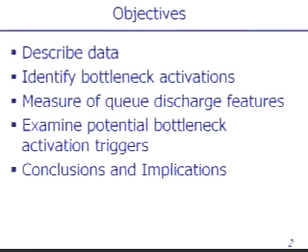It's one thing to study traffic jams and think it's neat to see the data, but the whole idea is: are there things triggering traffic jams? Are there bottlenecks being activated for predictable reasons? Because ultimately, traffic managers would want to be able to manage the flow of traffic. If there are certain things they can do, whether variable message signs, variable speed limits, or other information to the driver, that could mitigate some impacts of these bottleneck activations. Then I'd like to talk about implications of this research and what areas I think are really ripe for further research.

The data set I was working with is from Germany. On the map, Frankfurt is at the bottom, and the A5, which I'm going to discuss, is highlighted in yellow, studying a portion just north and west of the city. If you've ever been to Frankfurt, the airport is right down here — I think Schweinheim is the name of the airport area. I had a chance to visit last summer and, speaking with drivers there, noticed this is not only a heavily traveled urban freeway with a lot of commuters and other traffic, but also a major north-south corridor throughout Germany and the Hessen province.

The data set is about 30 kilometers in length, going from the south up to the north, from A648, an Autobahn connector into Frankfurt, up north to a small town called Friedberg. There's a series of 30 detector stations on the freeway, and the middle strip map shows these detector stations. The distance between stations ranges from about 400 meters up to 2,000 meters in the less traveled sections.

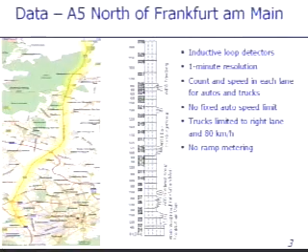It's worth mentioning that in Germany in 2001, when these data were collected, as well as today, there's very little in the way of ramp metering. There are no ramp meters, at least there weren't in September on this highway, and I didn't hear of any plans to install them anytime soon. So no ramp metering on those freeway interchanges.

Looking back a bit at what's been done in freeway studies in the past, there's really a wealth of good, solid studies conducted previously. I'd say going back at least 50 years of people analyzing freeway bottlenecks. I think of that 50 years as being about as long as freeways have existed. So I think as long as we've had freeways, we've had congestion problems, and to a certain extent, some bottlenecks.

A lot of the data from early studies were limited by the collection techniques. They were manually collected, either going out and doing direct observation, or maybe analyzing air photographs, which is great data, but it's really hard to collect large quantities of it to get the breadth and depth of research we're looking for. So you had short durations, studies occurring at fixed points that were very interesting, but it maybe wasn't getting the full picture unless you could look at a larger strip of roadway over a longer time period.

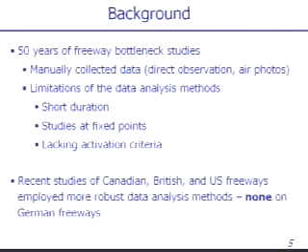There have been a number of good studies more recently on Canadian, British, US, and now German freeways using better, more robust analysis methods. These are now being applied in this study and in some good work being done right now here at Portland State by the ITS lab on German freeways using these data analysis techniques.

What you can do to clean the data up a little is aggregate it into larger time periods. But that diminishes your ability to determine exactly when certain things occurred on the roadway. So I think there were some real limits in this.

Flow - vehicles per hour in this case. So it's a rate, a traffic rate.

Thank you very much. I think I copied and pasted - yeah, it should be vehicles per hour, certainly.

Apologies for that. So the limitations of some of these data analyses - you can certainly see drops in speed, but are you going to be able to find out exactly when the drop in speed occurred? And are you going to be able to pin it to a particular point in time and a particular place on the roadway where a bottleneck has become activated? That's the key and the objective of my research.

This method is a plot of cumulative counts. Imagine on the x-axis we're plotting time, on the y-axis we're plotting cumulative count, the number of vehicles that have passed a point X. So someone's standing there on the road counting these vehicles going by and the times that they go by. Cumulative count means the total number of vehicles that have passed a stationary observer at one point.

If you would see a change, first let's define what the slope of this line is. It's not kilometers per hour—this is flow, so this is numbers of vehicles per time. I'm looking at it primarily in vehicles per hour. So if the slope is flow, then changes in slope represent either flow increases or flow decreases.

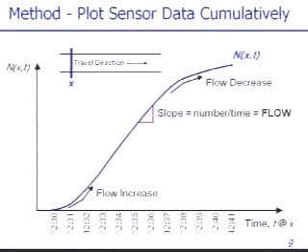It sounds good, and it works well on this style of graph because I just made this up on Excel with some fictitious data. But when we look at data coming from the freeway, we find a very large number of vehicles going by—5,000 vehicles in a 1 hour period. When you get that cumulative count plotted on the time series, you'll find that it looks like a straight line.

There's a little bump there, see around 1,400, but I couldn't tell a whole bunch from that. So I need to zoom in, right? Need to get in there and look in a little more detail.

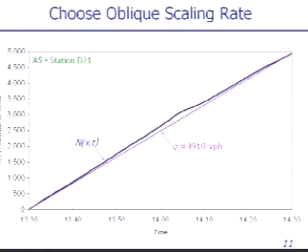The way I zoomed in was to take a straight edge and find out what is the average flow that's occurring throughout this time period. I put my straight edge on there and find out that the time period average flow is about 4,910 vehicles per hour. That's what that pink line represents. So if the blue line represents cumulative count, the pink line is kind of the background flow, if you want.

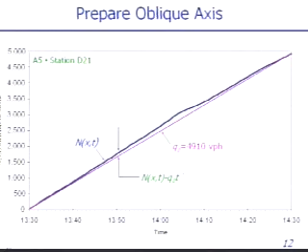Then what I wanted to do was plot a smaller variable. Instead of plotting the entire n, I plot n minus the count at a particular time. I get the count at a particular time by taking this background flow rate of, say, 4,910, multiplying it by the time elapsed from the beginning of the analysis period. Then what I'm really counting is just the number of vehicles between the two lines. When I plot the number of vehicles between the two lines but hold the y-axis the same, I get that same plot, which makes sense.

But now I don't need to plot all 5,000 vehicles, right? I only need to plot up to the limit of the spread, which was about 250 vehicles in this case. So now by plotting time on the x-axis and on the y-axis the difference between those two lines, I get a line that instead of just having a little blip around 1,400, now shows what to me was a pretty notable flow drop.

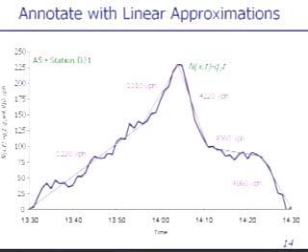So again I get the straight edge out and do some piecewise linear interpolation here, and I get some differing flow rates. The one that really stands out is this 5510, dropping pretty significantly, I think, from 5510 down to 4220. So it's no longer just a little blip on the graph. Now I'm getting into detail, finding out when that flow drop occurred.

Work with me for a moment. If you go back to that previous slide where we talked about the standard cumulative plot at one station, I'm now calling that X1. What if I added another station and called that X2?

So now I'm getting counts at two adjacent stations. The difference between these two stations on the time axis is going to be the trip time between the two stations. And if you think of it, the free flow time it takes for a vehicle to get from X1 to X2 in freely flowing traffic would be that reference vehicle trip time. What else can we see from this graph?

Well, for example, at any particular time, say T1, the difference between these two plots would be the number of vehicles that are on the roadway between X1 and X2. And then at a particular vehicle, say vehicle J, we can see its trip time. So I said in general we're talking about the horizontal difference being trip time, but we can actually pin it down to each individual vehicle's trip time.

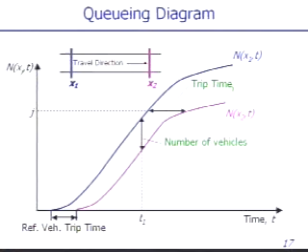Now imagine I take that upstream curve and shift it to the right by the free flow trip time. If all the vehicles were freely flowing, the two curves would be perfectly superimposed, right? Because each individual vehicle's trip time would simply be the free flow trip time. And in the early reaches of the curve, that's shown—those two lines are sitting one on top of one another.

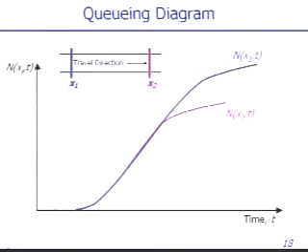So what can we say? We can say that in the shifted curve analysis, curves that are superimposed represent freely flowing traffic between those two stations. Now where the curves are separated, we no longer just have time, we have the excess of time, right? So the difference between the blue and pink lines here horizontally for a vehicle K is excess travel time. Traffic engineers, we like to call that delay.

And for time 2, what's this accumulation? It's not just the number of vehicles on the roadway, it's the number of vehicles on the roadway between X1 and X2 that's in excess of what would be there during freely flowing traffic. So we have excess accumulation and we have delay. Well, those are traditional definitions of congested traffic. We have congestion now—in other words, the activation of a bottleneck. Something is being caused, or at least it's occurring, at these two stations.

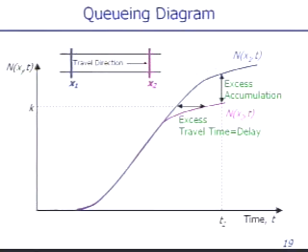There's something occurring. Now, whether it was activated further upstream or downstream, we don't know yet. We're just looking at two different stations that are adjacent to one another.

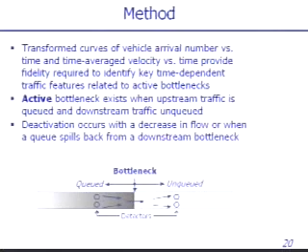Think back to the traditional definition of a freeway bottleneck. It's just a point on the road, downstream of which traffic is flowing freely, unqueued, and upstream of which traffic is queued. That's the fundamental definition of a bottleneck, and by taking that analysis technique shown in the previous slide and applying it to longer time periods and multiple stations, we can start to find out when and where freely flowing traffic existed or didn't exist.

So that's what I'm going to do next. I'm going to show you how those lines that were just created to illustrate the basic idea have now been applied to some real data.

The real situation I'm looking at here is on the A5, an interchange on the north side going off into a smaller town called Friedberg. You'll notice that station D24 is immediately upstream of the off-ramp. I've got data here for stations 24, 23, 22, 21, and 20.

D24 I've plotted in black, with the difference in cumulative count plotted on the y-axis and time on the x-axis. Then I've plotted stations D23, 22, 21, and 20, shifting each of those over by the free flow travel time.

Now it's not quite as clean as it was on my hypothetical drawing. Not all these lines are perfectly superimposed because there's a little bit of variation going on in the traffic. For one thing, the traffic detectors aren't necessarily catching each and every vehicle—there's a bit of detector error, and people change lanes right as they're going over a detector, those sorts of things.

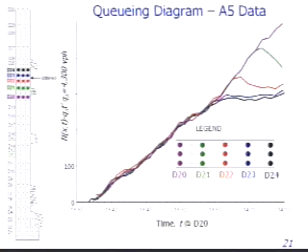But you can see there's clearly a trend here. We're seeing that stations 20 all the way through 24, for the early reaches, almost until about 1400, those lines are pretty much superimposed. It really looks like freely flowing traffic.

If you look at what's happening at station D22 at 1402, you'll see a distinct change in the behavior of the graphs. Curves 23 and 24 remain superimposed, so there's freely flowing traffic throughout the time period, including past 1400, between stations D23 and D24.

But upstream of that, we're starting to see separation vertically and horizontally—excess travel time and excess accumulation. So there's congestion. We can see that at about 1402 is where the spread started to occur between stations D22 and D23.

And then at station D22, we see a drop in flow. Why would there be a drop in flow? It's because we have a shock moving back through the traffic stream, and the drop in flow is now hitting station D22, upstream of this occurrence.

So downstream of D23, stations D23 and D24 have freely flowing traffic—we say those are downstream of the bottleneck. Stations D22 and D23 have excess accumulation and delay, so we say that's upstream of the bottleneck. It's somewhere between D22 and D23.

With the data that I had, I can't get any more detailed than that. I don't know exactly where between those two stations, but I do know it's occurring between them.

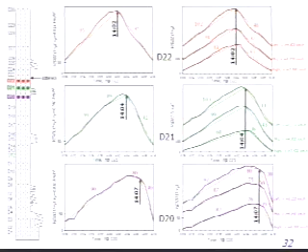I could also look at individual cars and trucks. I haven't shown that graph here, but these are things I analyzed to look at how vehicles were being impacted on the roadway, trying to see whether there's any discernible difference between car and truck behavior. This shows the rest of the speed curves.

But now we're looking downstream. Why would there be velocity drops downstream of the bottleneck? At first that doesn't seem to make sense. But if the cars have had to slow to move through the bottleneck, imagine they are accelerating out of the bottleneck, away from it, but they're not going to instantly get back up to their free flow speeds. These German drivers drive quickly, so for them to get back up to free flow speed may take a little while.

We will see at station D23, the first station downstream of the bottleneck activation, that this is actually occurring. When I first saw this data I thought something was wrong, and I went to Rob Bertini and said, help me figure out why the speed is dropping earlier at station D23 than at D22.

So Rob, as he does on the great whiteboard there at the ITS lab, drew me some pictures, and we got the idea that the backward moving wave is not moving at the same speed as the forward moving shock. The shock of increasing speed moves at the speed of the vehicles, so it might be moving much more quickly downstream than the shock that's moving upstream.

That's why this drop at station D23 is occurring just slightly before we saw the speed drop back at station D22. Does that mean the bottleneck is closer to D23? Not necessarily, because the speed of the wave is also faster. So you could do a kind of triangulation to try to figure out where that occurred between those two stations.

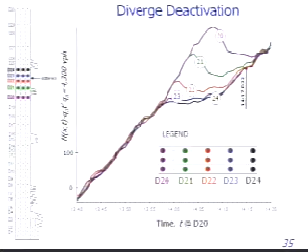Now, there's still queued traffic further upstream, and it's going to take a while for all the effects of that queued traffic to dissipate, so I can look further upstream. Before I do that, I just want to verify that when the curves came back together, I should see an increase in speed, right? Because freely flowing traffic means the bottleneck's dissipated between 22 and 23. So now it's free flowing at station 23, and it's free flowing at station 22 at the point where the curves come back and the speed increases. So I see speed increasing at about 1417 here.

So now I've got bottleneck activation, bottleneck deactivation. I've defined the limits.

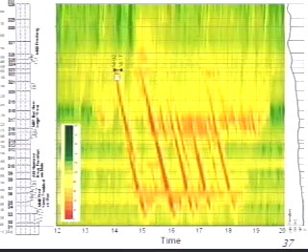And remember, I mentioned that red line moving back through the traffic stream. This is the shock speed. You're driving down the road, and this is everyone putting on their brake lights. That's the speed of that shock. If people were all reacting at the same time, we would see the brake lights coming on in progression, and that's the speed of that shock moving back through traffic.

It was a speed of approximately 21 kilometers per hour. Notice how close that line, if we took that slope of 21 kilometers per hour and compared it to all the other shocks, they all seem to be behaving the same way. So I'm an engineer, I get excited about straight lines, and the fact that repetitive straight lines are all occurring at the same time.

To me, that was pretty novel. So again, I went to my colleagues at the ITS lab and said, what else has been done? Do some more reading, find out. Yeah, other shocks have been measured, and in fact this is not an unreasonable speed. This type of speed had been seen on a number of different roadways. I'm not saying it's the exact same on every freeway, but there seemed to be some reproducibility of that.

So I repeat that analysis many more times, okay? I plot so much paper that it fills up two filing cabinets in my office now. But I use all these subplots that I've showed you, the shifted and oblique plotting, to find out that there are a whole bunch of bottleneck activations on that day, and they range from very short in duration and very limited impact on the road to some ones that had some pretty serious, long-lasting impact.

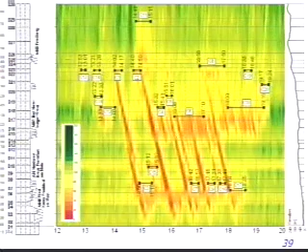Okay, once the spatial and temporal limits of the bottleneck activation have been established, I know when and where, for how long. Then I can start to look at what's the so-what question. So why look at this stuff? Well, I told you that I wanted to look at what might have caused them, but I also want to look at the impact of the bottleneck itself.

Well, I think maybe we should, because the capacity of the bottleneck is not necessarily the same after it's been activated. So the pre-bottleneck activation flow here of 5,190 in 3 lanes seemed a little lower than what I was thinking. I looked in the German highway capacity manual and found out that actually that was not out of line with what German engineers would say is the expected capacity of a 3-lane facility like that.

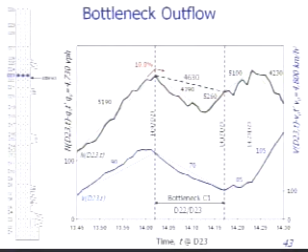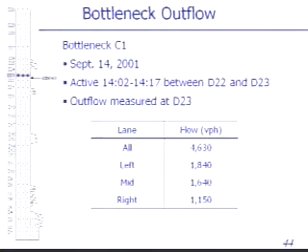Just an example of some of the data and how I reported some of the results. I looked at this bottleneck C1, as I showed you. It was active from 1402 to 1417. Here's the outflow. I looked at it on a lane-by-lane basis, and then also all lanes together. You can see the left lane carrying the majority of the traffic while the bottleneck was active: 1,800, 1,600, and about just a little less than 1,200.

It turns out that in the 6 days I analyzed in my research, a bottleneck occurred between stations D22 and D24, and I grouped those together because I felt they were being influenced by the same exit just downstream of station D24. So I called that range of about 1,200 meters between D22 and D24 one analysis area, and found that 21 times, pretty repeatable, this bottleneck was being activated. The durations ranged from really short, 7 minutes, up to 223 minutes.

So there was a couple of really long activations there. And it was interesting to note that in those 21 times, I had average flows that were reasonably close. 4,890 is the average flow. You can see the standard deviation there. The left, mid, and right lane flows are shown as well.

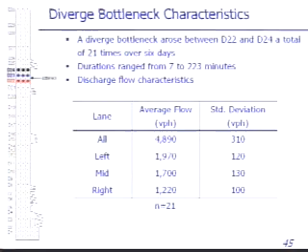12 of those 21 were of particular interest to me because they were bottleneck activations that occurred when the previous traffic flow was free flow, uninterrupted flow, okay? So if we've got freely flowing traffic occurring prior to the bottleneck being activated, I tried to differentiate those from bottlenecks that were being activated and impacted by the flows from downstream bottlenecks. If the flow was being choked off downstream, I had a hard time really taking that data and analyzing it explicitly for mine, right?

So I wanted to be looking at bottlenecks that were kind of isolated, not being impacted by downstream bottlenecks. I called these isolated bottleneck activations. So 12 of those 21 were isolated bottleneck activations. In particular, what I was interested in here is whether that drop in flow I saw in this apparent two-capacity thing occurred at more than one place. Was it repeatable? Was it reproducible? So here we've got, on both all lanes and on a lane-by-lane basis, the pre-queue and the discharge flows, and then the associated drops.

I think what was interesting here is that the overall flow drop was a little over 4%, but a large amount of flow drop was occurring in the left-hand lane, the faster flowing, automobile-dominated traffic. In the mid lane, a much less pronounced flow drop, and then in the right lane, almost an imperceptible flow drop across the 12 stations. So in the right lane, where it's pretty much truck-dominated, we weren't seeing a big decrease in flow after the activation of the bottleneck.

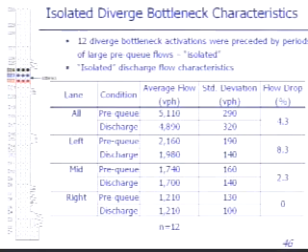Now, it's important to know what's going on downstream, what's happening at the outflow side, the outlet, right? I mentioned why that's important for a freeway manager to know what is the real capacity of my section of freeway. And more than just looking at a book, is there a way of actually determining with real data what the capacity of that section of freeway is?

But also it's important to look at what's going on upstream and what might be happening in the traffic flow that has the potential to trigger a bottleneck activation. So I looked at a large number of different things here. I looked at lane changing, and I looked at trucks and cars and things like that. I want to show you just a few of the slides that led me to some conclusions related to bottleneck activations.

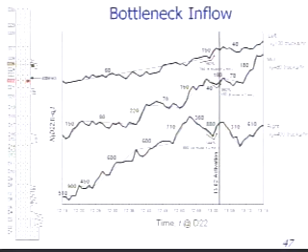But if a few of them start to go around right at the time where the rest of the traffic seems to be building up, now you've got a truck that's maybe at 80 moving over into the mid lane where cars were wanting to move at 130 kilometers per hour. You can see the impact that would have. And so trucks moving out of the right lane into the mid and left lane seem to be causing some of this, the triggering of the bottleneck activation.

I want to look at bottleneck inflow again, but now on an all-vehicle basis. And what I'm doing here is looking at the left, mid, and right. I've parsed it out by lane. And I want to look at just the 2-minute band. See that little gray area there on the graph? That's showing the 2-minute period just ahead of the bottleneck activation.

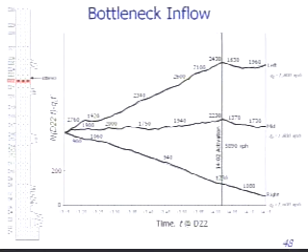Look at the left-hand lane, 2,430 vehicles on an hourly basis in that 2-minute period. That's a pretty significant flow. 2,230 in the mid lane, 1,380 in the right, quite a bit lower, but remember that those are long vehicles because, as we saw in the previous slide, a very large percentage of them are trucks.

In addition, there was this idea of the trucks and their influence on the traffic stream. One of the things that I looked at, and there's always a concern that highway engineers have: how do we track the influence of a truck on a traffic stream? What we often try to do is make them equivalent to a certain number of cars, and then we replace it in the equation.

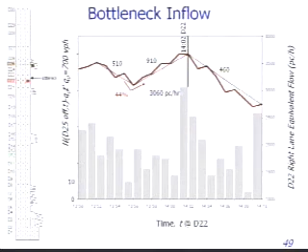It's kind of a standard thing that's done. The Highway Capacity Manual has some guidance on that, what sort of passenger car equivalent rate to use. Because these weren't severe grades, I chose a value of 2 passenger cars for every truck. I wanted to look at equivalent flow—if we take all the trucks, turn them into 2 passenger cars, add them up with the passenger cars, what's the flow rate? That's what's shown on the bar graph here. See the big spike, 3,060 equivalent vehicles per hour in that 1-minute period just ahead of the bottleneck activation. So further indication of trucks and their influence in the activation.

So it's when an increase in truck traffic coincides with an increase in overall traffic. And then in several of them, in 7 cases, there was also a notable increase in the off-ramp demand. Maybe it's some vehicles moving over from the left lane, moving their way over to the right lane in order to exit. Of course, they've got a pretty steady stream of trucks there, so it's not the easiest thing to get into that lane. There's another issue that comes into play with bottleneck activations.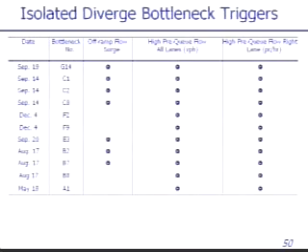The deactivations were not quite as voluminous. I didn't have as much data as I would have liked here on the isolated bottleneck deactivations. I'm going to show you a couple things that seem to be reproducible, but to say something's reproducible over 2 activations is not a real strong statement. I'm continuing work in this area with others to try to get more data on these bottleneck deactivations. But as you might expect, it seemed as though when we had a drop in off-ramp flow, so there's less demand at the off-ramp, that seemed to coincide with it. It happened in both of the 2 cases that I analyzed.

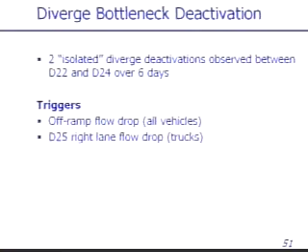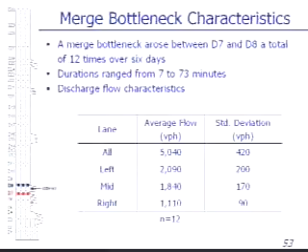Also looked at merges. I'll spare you the details of all the graphs, but I did the same thing for merges, looking at areas where vehicles were merging onto the highway. I found that a merge bottleneck arose upstream on the roadway between D7 and D8—you'll see there the red and blue stations. 12 times that bottleneck area had an activation, lasting 7 to 73 minutes, again pretty widespread. Here's some indication of the average flows, both on an all-lane basis and then left, mid, and right.

What happens on merge—do they experience the same sort of 2-capacity phenomena that diverge did? Yes, according to my results, they did. Not maybe as large in magnitude, a drop more like 2.5%. But notice where the majority of that drop is coming from: it's the mid lane, quite a bit different than the diverge, which was left. Now notice the right lane does experience a flow drop. Of course, the right lane is the area having the most friction between the merging traffic and the diverging traffic, and also the mid lane, that's what's receiving the lane changes.

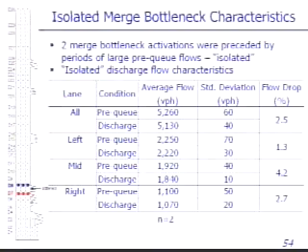I noticed that the German drivers are actually quite polite in a way. Not if you're traveling slow in the left lane, because they flash their lights at you, but they're pretty good at interchanges, and I find them, in a way, kinder than some American freeway drivers, where they would let you merge over to allow for incoming traffic. People in the right lane were pretty good at making gaps for incoming traffic, and the mid lane people were allowing people to make lane changes over, which was nice, a polite driver technique. That showed up in the data here, because polite drivers are going to cause a decrease in capacity, a decrease in flow rate in those mid lanes.

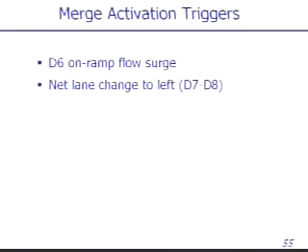Triggers for the merge activations - no surprise here, on-ramp surges. More vehicles trying to get on the road, causing those merge activations. And then we've got the net lane changes, as I just talked about - people are moving over into the mid and left lanes, but they're not traveling as fast as the people in those lanes had wanted them to travel. So that seems to be what's causing it. I'm not saying one is necessarily the effect of the other, but it's primarily this on-ramp surge in flow.

So in conclusion, some of my conclusions were that bottlenecks were occurring at predictable locations, predominantly merge and diverge areas. The discharge flows are reproducible across all the lanes, pretty much on a lane-by-lane basis, and the discharge flows were nearly constant, so I think they should be viewed as the bottleneck's capacity. So when traffic engineers are analyzing these pieces of roadway, I think they need to use this type of technique to find out what is the capacity of that section of freeway.

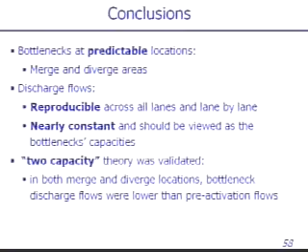And I'm not claiming to be the first person that saw this capacity concept. James Banks from San Diego has published papers on this, and I think this was some independent validation. I don't think it had ever really been done on the German freeways prior to me doing it, so I was able to validate Banks's capacity theory.

So we have discharge flows that were lower than the pre-activation flows - pretty important from a freeway management point of view. These traffic disturbances were traveling at nearly constant speeds, about 20 kilometers per hour, and they were traveling very long distances, 20 kilometers, without spreading. By that I mean you didn't see the red bands getting larger - the amount of time congestion was evident at each station remained almost uniform, almost strangely so in my opinion. I couldn't believe quite how tight those red bands were.

Merge bottleneck triggers were increased on-ramp flows and lane changing to the left. Diverge, as I showed you first, were off-ramp flows, high pre-queue flows, and truck influence in the right lane.

I think I benefited greatly by having data that was provided to me nicely split up into cars and trucks. It allowed me to do some things that, quite honestly, you can't do from all loop detector data, because not all loop detector data is parsed in that way. I think it allowed me to do some interesting things and start talking about truck influences for the bottleneck activations that maybe hadn't been explored too much before.